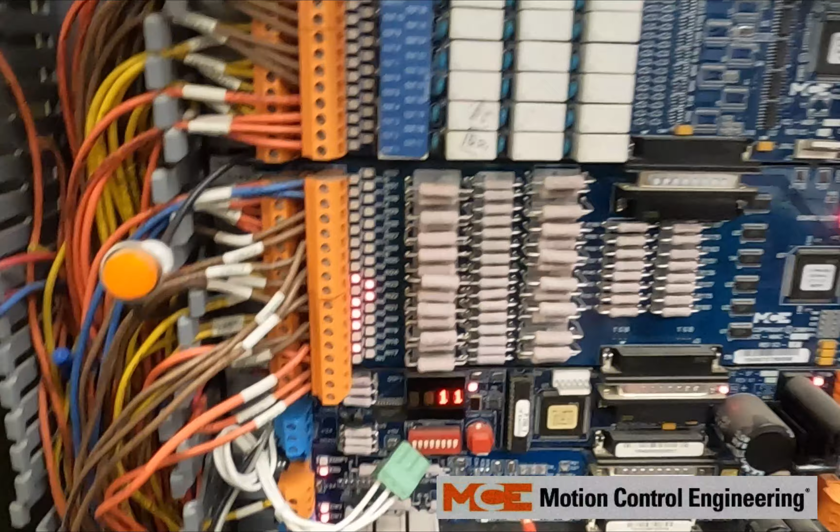We're going to be explaining this for troubleshooting purposes, if you're showing NC on the 4-digit matrix display, 2844, or even 2V, or some other weird number or letters, when it's not showing you the actual position of where the car is at. So follow along and hopefully this video will help you out.

So for troubleshooting, if you're getting any weird messages on your 4-digit matrix display, you want to check your fuse on the SF-CE board, make sure it's not blown. After that, you're going to check your voltages.

You're going to put your meter on DC voltage. You're going to test between 1 and SFX, getting your 18 volts there. Now from 1 to FX2, it's good, we'll be reading 0 volts. There's nothing connected to FX2.

So you're feeding the SF-CE board power. You're still reading NC here or 2V here. There's this 5-volt test point to the left of the diagnostic switches, so you want that to measure close to 5 volts.

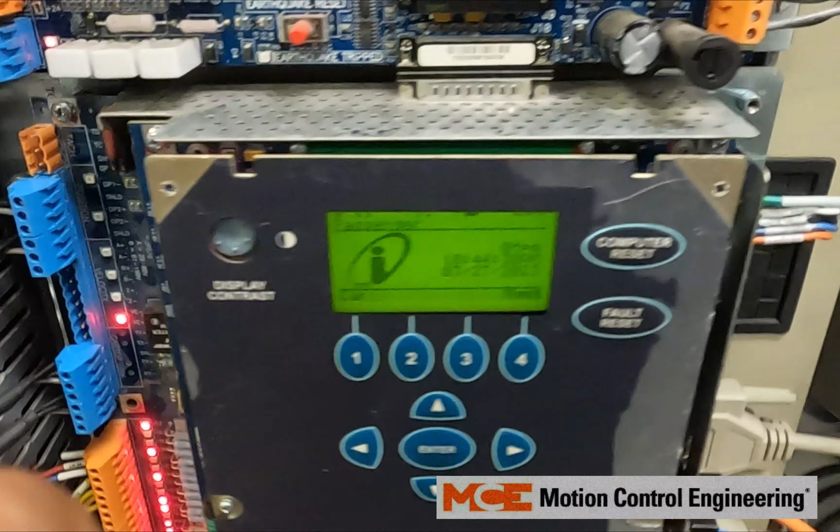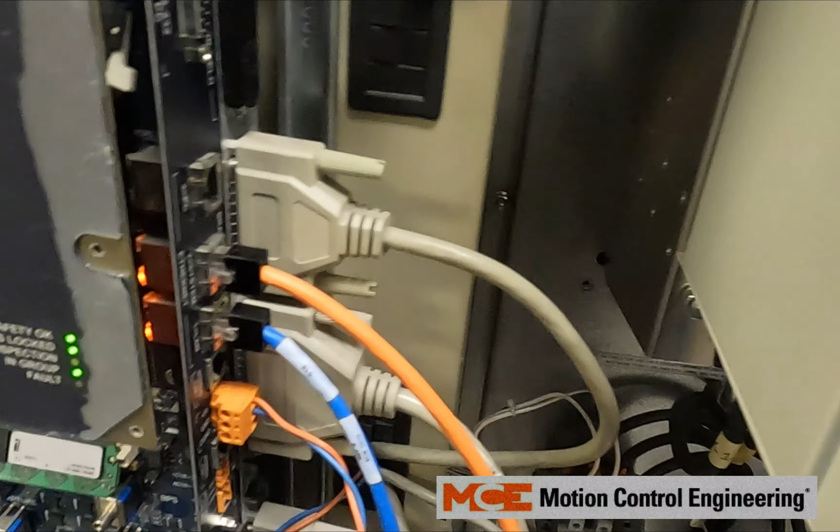So if you're measuring anything too high or too low, you're going to want to open up this cabinet. You got a flathead here, and a flathead down there that you need to unscrew. You can pull this swing panel door open, and then there will be your power supply. There's a 5-volt power supply trim pot that you can adjust on there.

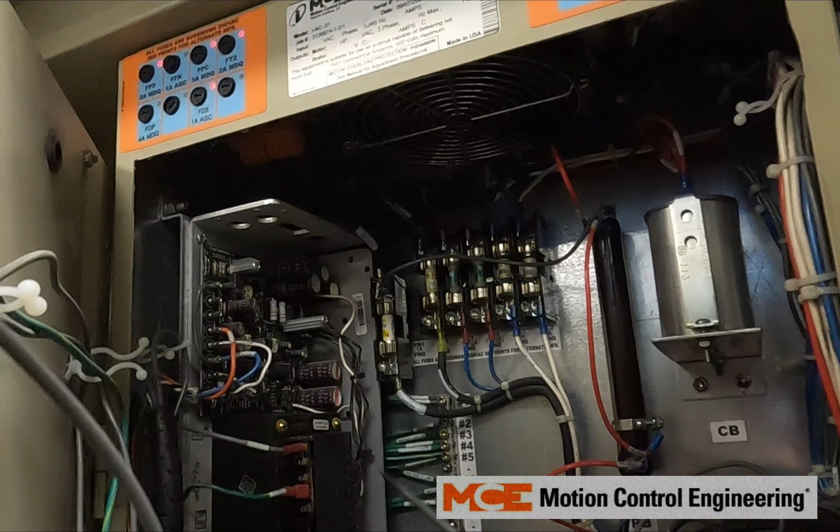So I'll pop this open. There will be your power supply right there, and there will be a 5V voltage trim pot on there that you can adjust up or down to get your 5 volts on that test point for your SF-CE board.

So that's for testing your voltages on your SF-CE board. If you're still showing NC or 2V or 2844, after that's checked and it's reading 5.0 volts DC to ground or common, you're going to want to come over here.

Let's keep in mind we have the IMP board, we have the earthquake board here first, the SF-CE board second, MIAC board third, MOR board fourth.

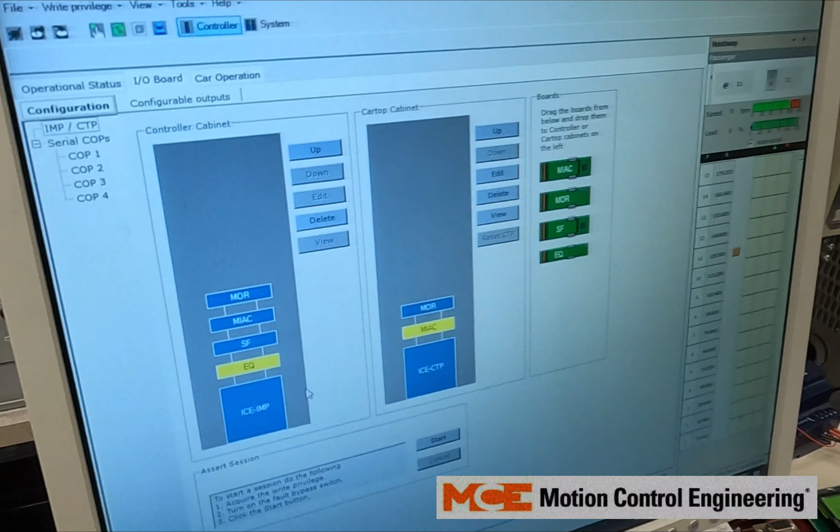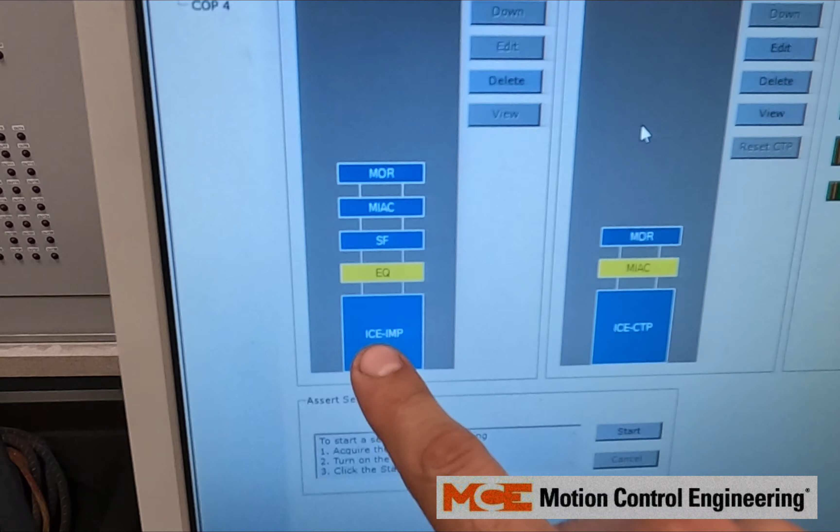So here you're going to go to View, Configuration, IO boards. Get this screen open. You're going to look in the controller cabinet. You're going to see IMP, earthquake, SF board, MIAC, MOR board.

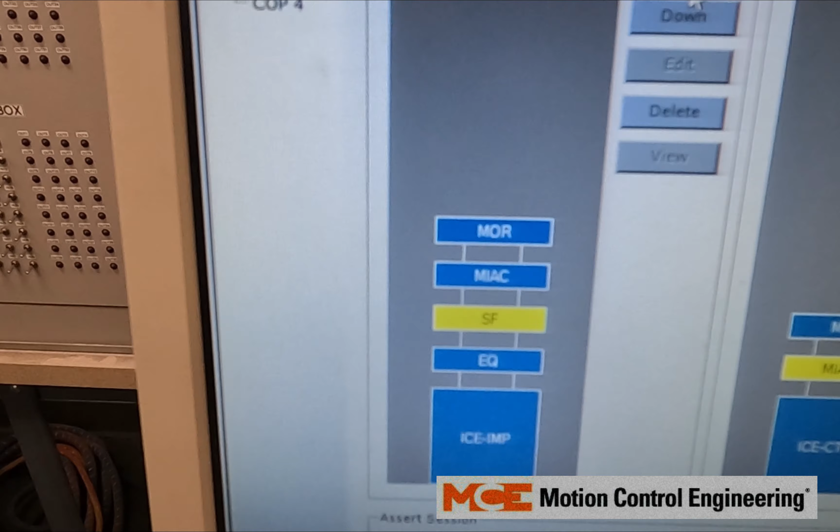Many times this SF-CE board will be up or below in the configuration file, but it's different physically, so we need to make sure that this is the same. If need be, you might need to highlight it, press up or down, and then click Start. Press computer reset on your iBox to see if now you have the correct value and you're not displaying your 2844, 2V, or NC as in no communication.

You could also power down. Make sure that this chip right here is pushed in all the way for the CE electronic chip.

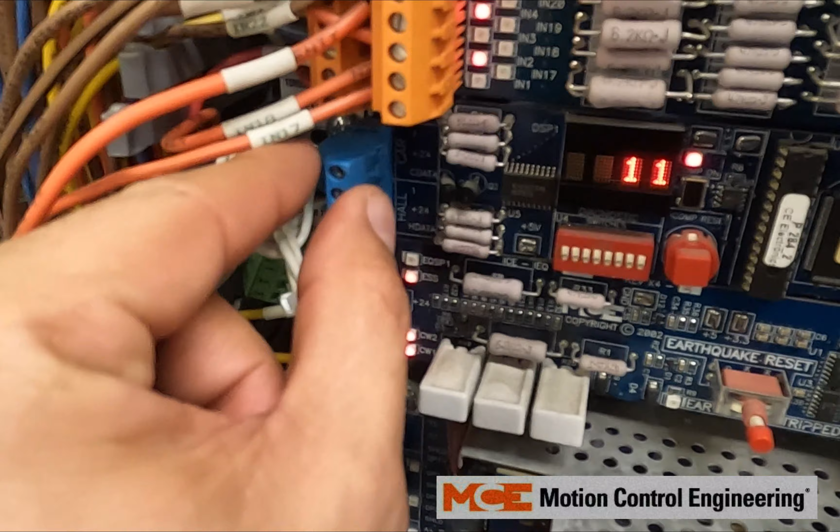Another thing you can try, if you're blowing a fuse on your SFCE board, you could unplug your Hall and your car serial PIs, replace your fuse, and see if you're still blowing the fuse with those connections disconnected, because it could be an issue, you might have a short on your

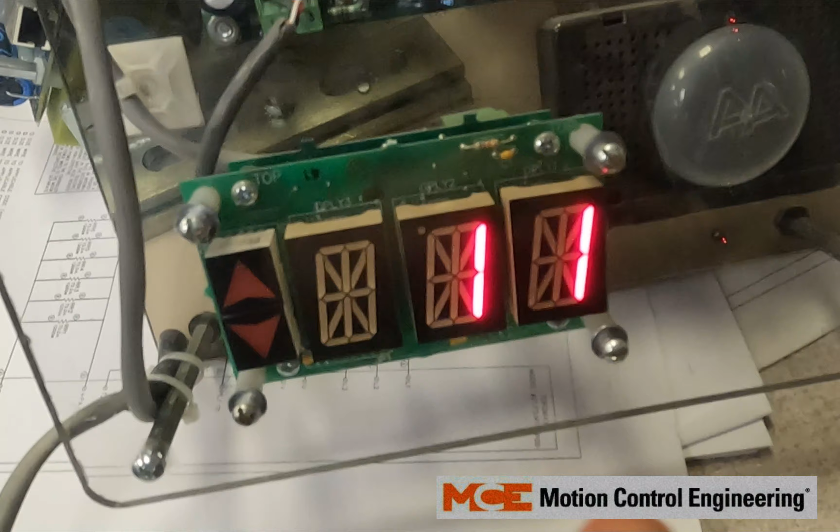PI. So this would be in the car or out in the hallway. You got a SF board sending the CE data and the voltages to your serial fixture inside of the car. So these are CE boards.

There's been times where only a certain amount of CE fixtures will display the numbers and the other ones will be glitching. If you have too many boards plugged into your SFCE board, you may need to contact CE Electronics to get a booster.

So that's it for testing voltages for the SFCE board. We have the correct number there where the car is at. 11, we're at the 11th landing.

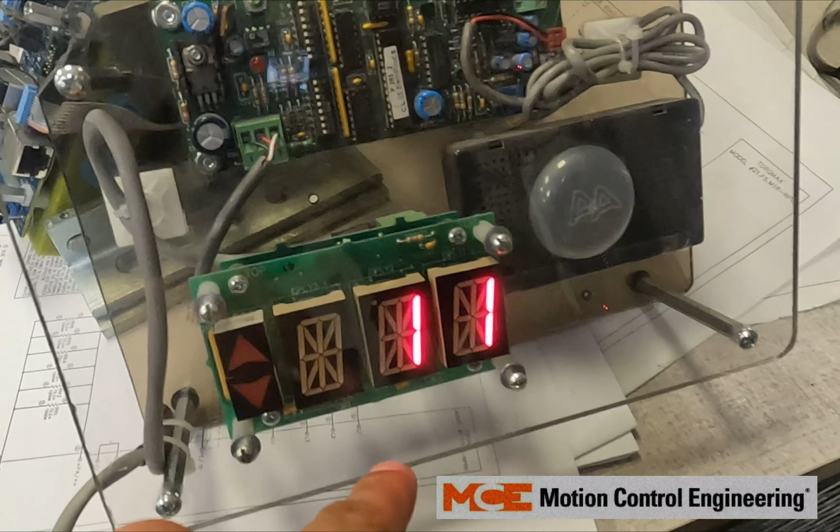The next thing we're going to cover is programming and how you can get the flashing light to go up or down as the car is running. If it's on independent service, it's going to show IN. If you're on inspection, IS. You could also change the programming in your iView.

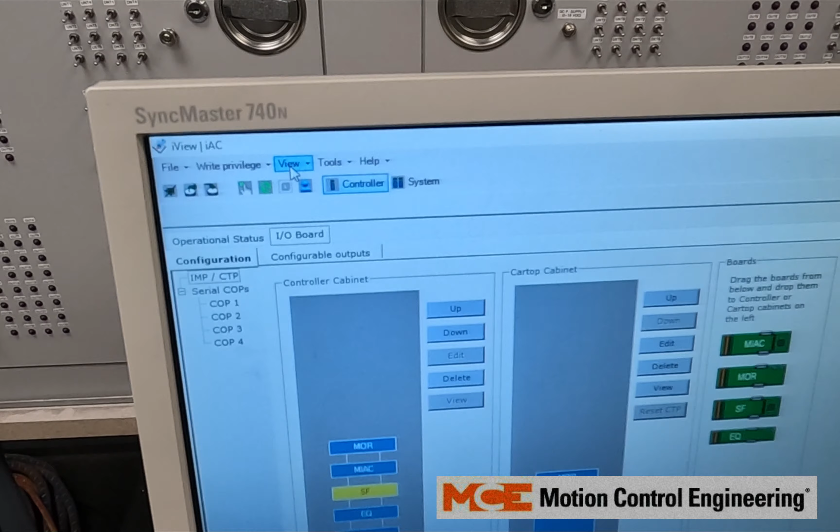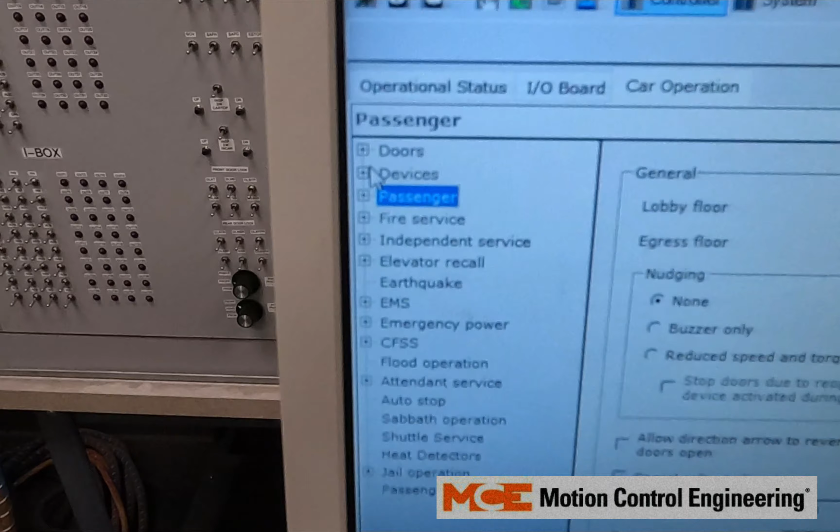So for that, you're going to go to View, Configuration, Car Operation. You're going to click the plus on devices. You're going to click ICE SF interface.

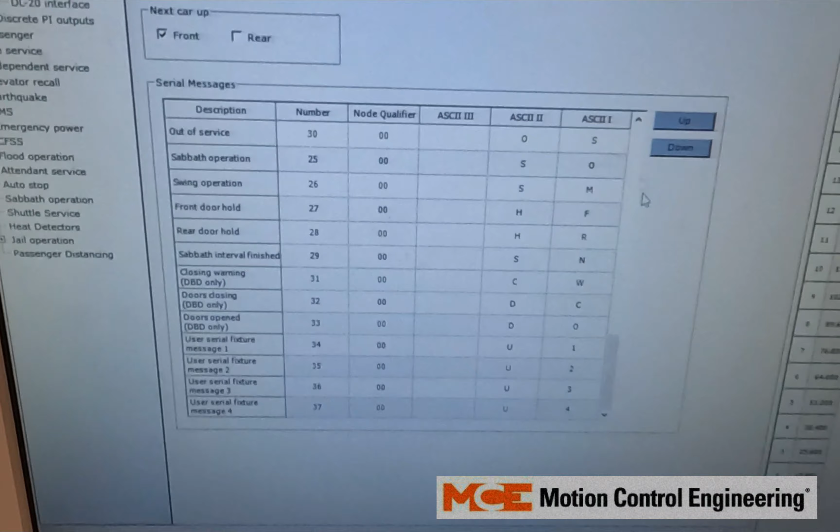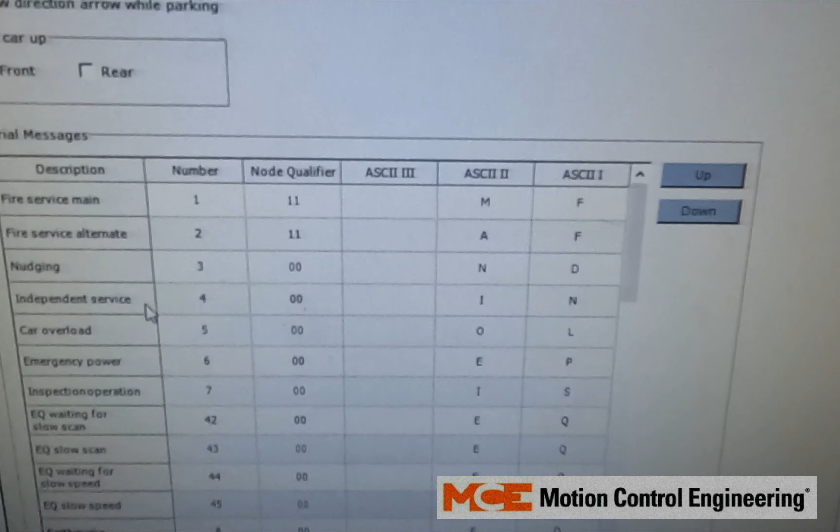So here you can show for what's being programmed. So for instance, for independent service, we have it set to IN. So we're going to go on independent service. Let's see which one independent service is - that'll be input 4.

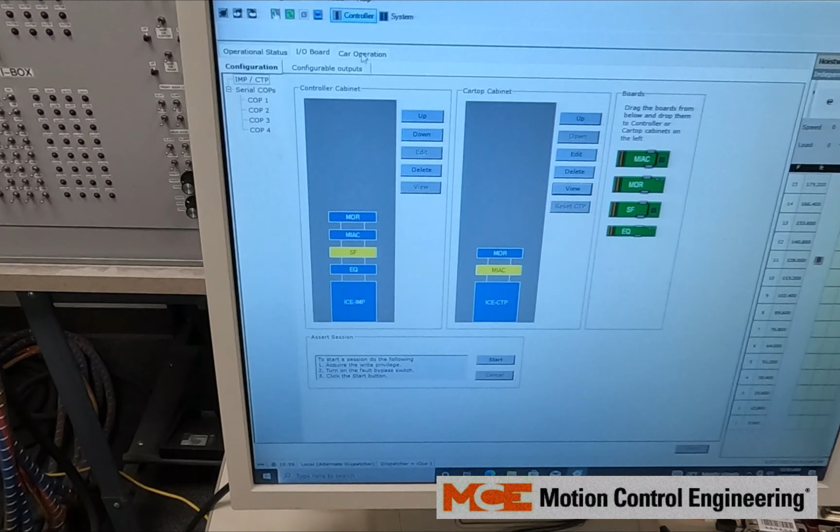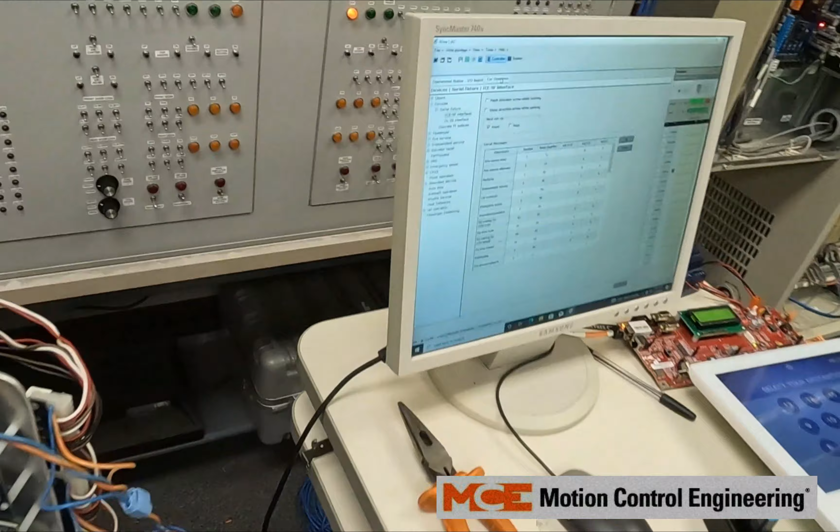It might be a different input on yours. But now we see that we're on independent service, IN in the car. You see IN. So we're going to take it off independent service.

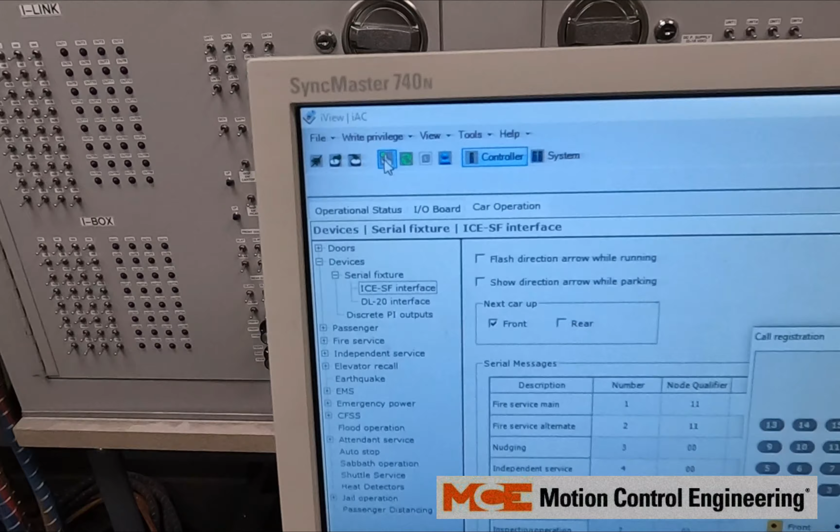You also have this option here to flash direction arrow while running. So we're going to give it a car call to another landing, and we're going to see how it does not flash the arrows - just stay solid.

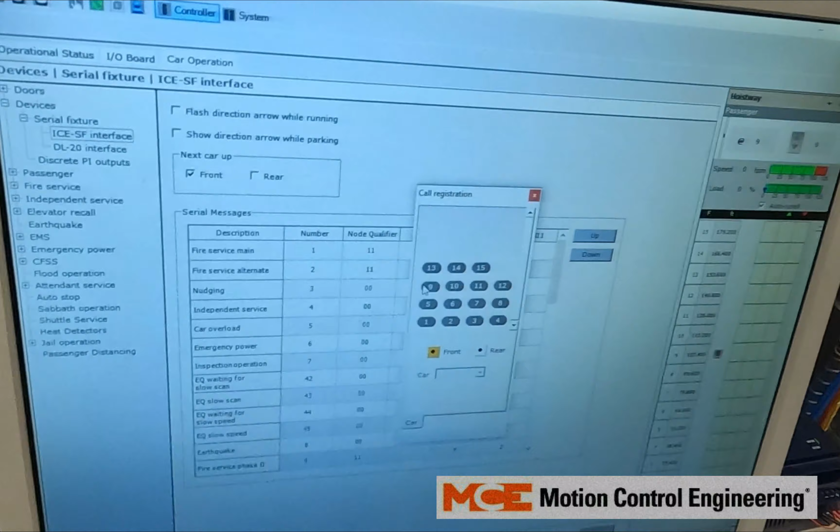So customers might want it to flash. We're going to now click flash, send it. Now it's flashing.

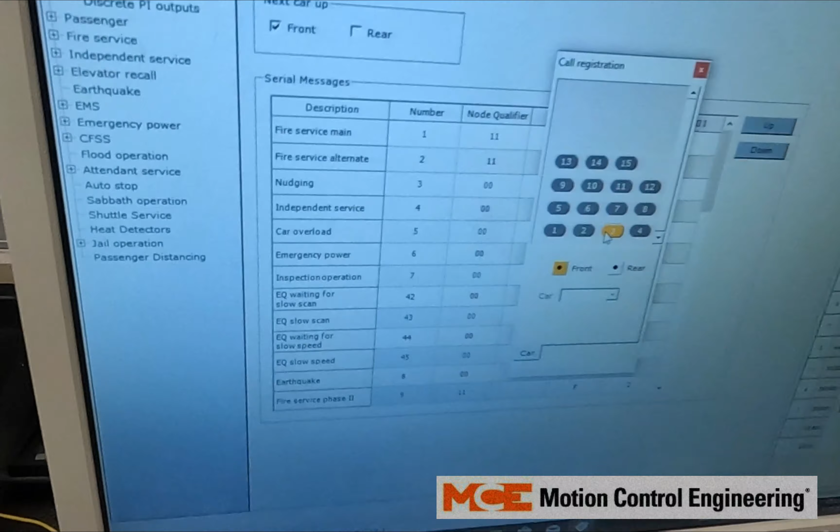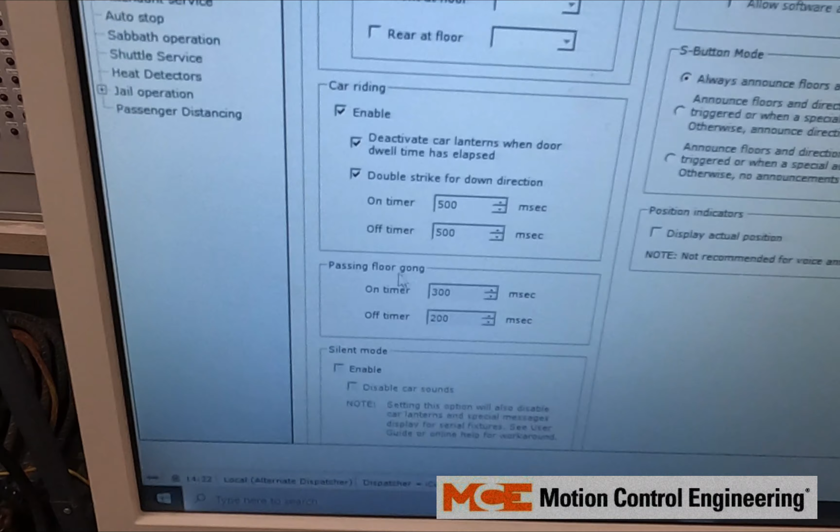So that's where you can program for the flashing. You guys might want to go to devices - you can adjust the car riding to double strike for down direction, the timing for it to be on, for it to be off as well. Your passing floor gongs could be adjusted on here as how long you want them to turn on for.

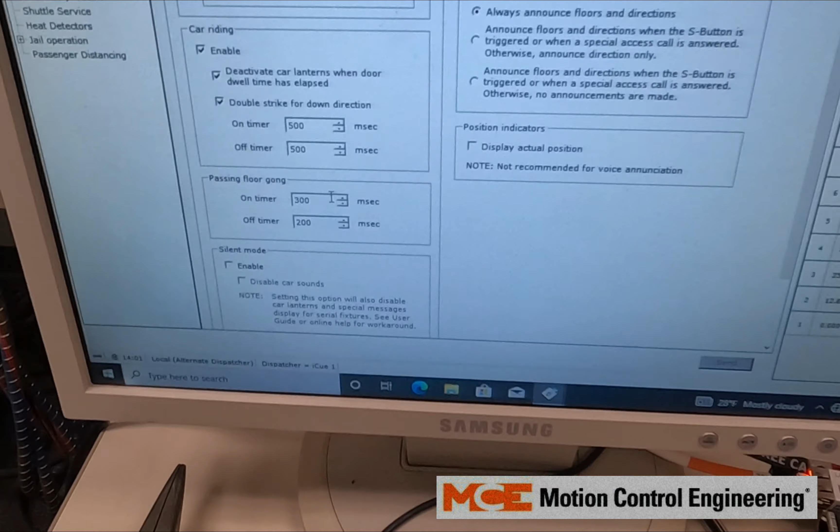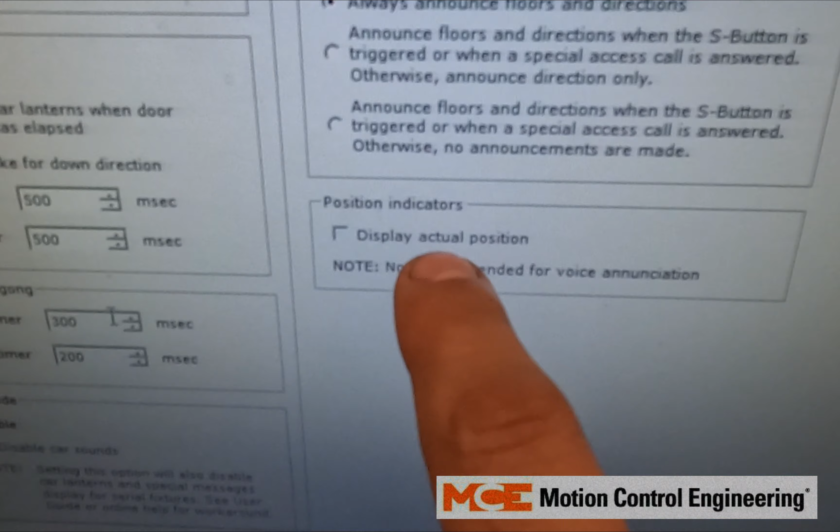If you're having issues too with the numbers skipping while you're on a high-rise building, and they're not going 1 2 3 4 5 6 7 8 9 10 as you're going up the hoistway, it might go 1 5 10. You want to make sure that you do not have a check mark for display actual position. That is usually the issue of why you would have that issue.

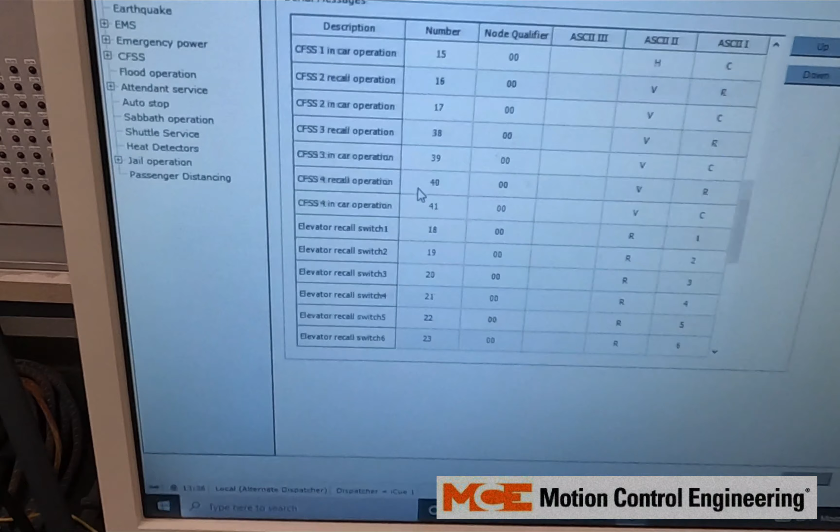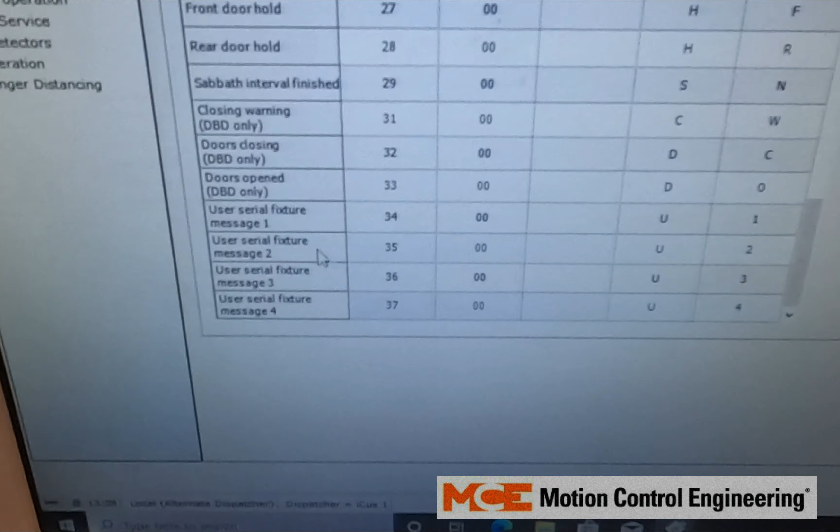So here we're going to give an example of how to program it with a manual configuration. So we have these options down below here. We're going to see user serial fixture message 1. So right now it's for U1. So what we can do is we can double click it. We're going to put an example here.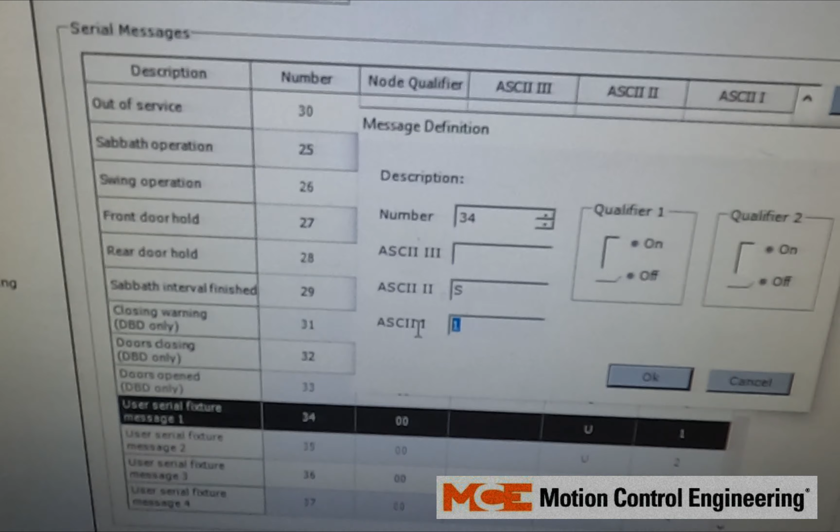We're going to want it to display SW, as in swing operation, or another programmable one. So we need a capital S, capital W. We're going to leave the qualifiers to what they were, the numbers to what they were. Okay, we're going to send it.

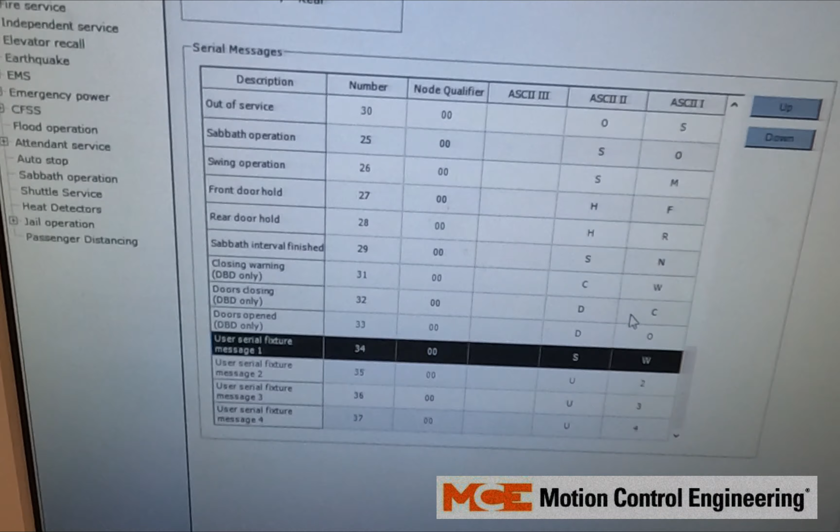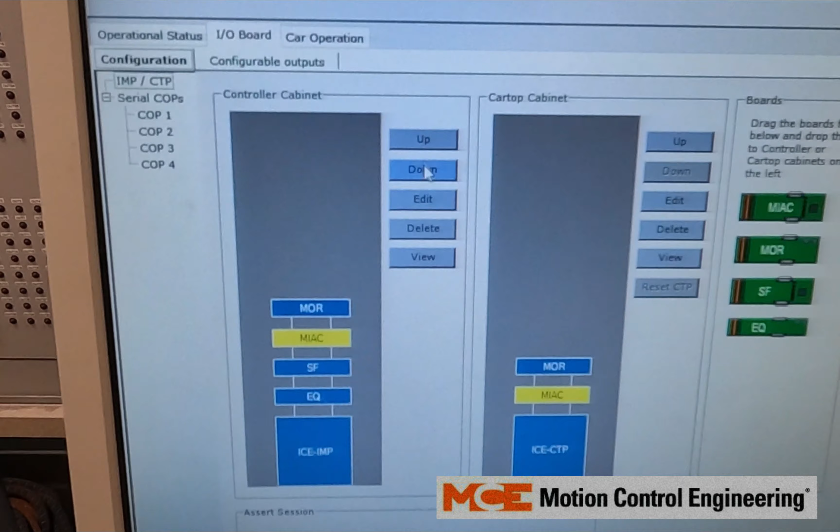All right, so after that's done, we're going to go highlight the MIAC. You're going to click edit. You're going to click this little arrow down. We're going to click on elevator. We're going to scroll down, go in here.

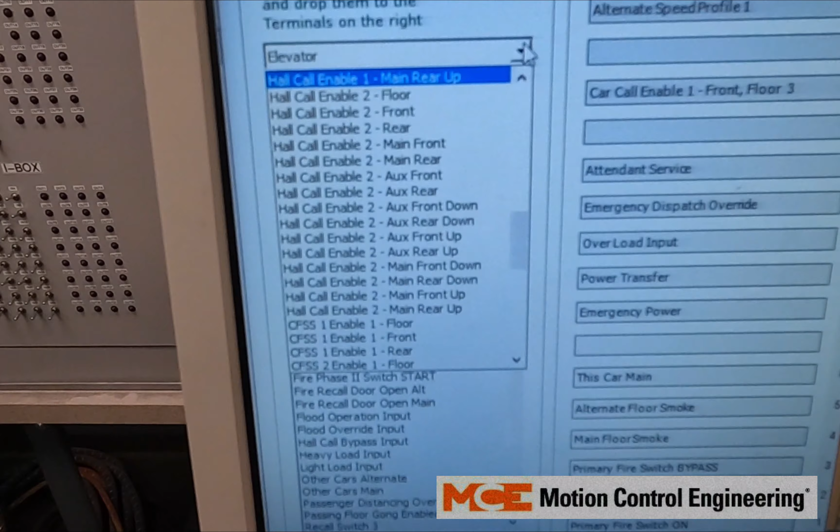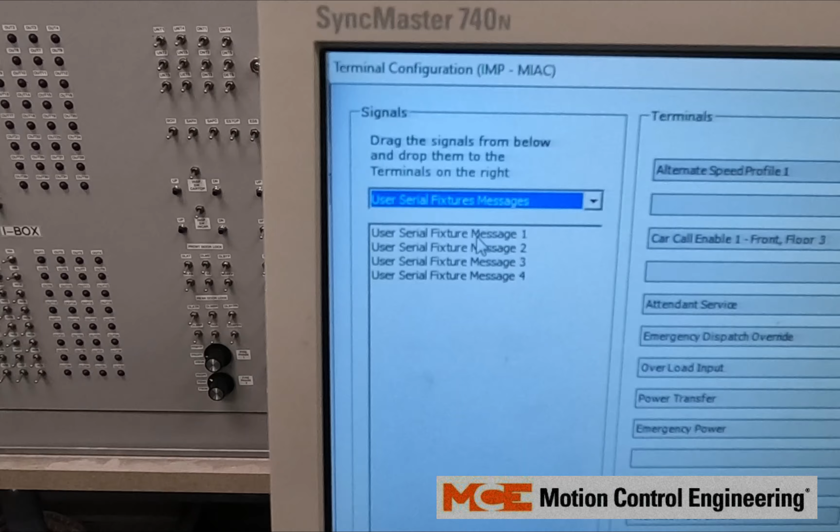We're going to press the little down arrow, and we're going to scroll down till you see user serial fixture messages. So we have that user serial fixture message 1 as we had it set to SW. So we're going to drag that over to input 13. We're going to send it. We're going to press OK. We're going to send it.

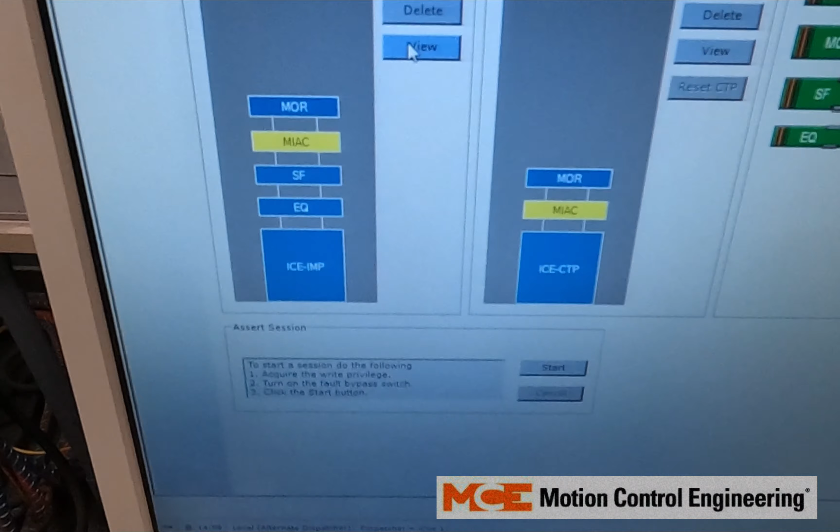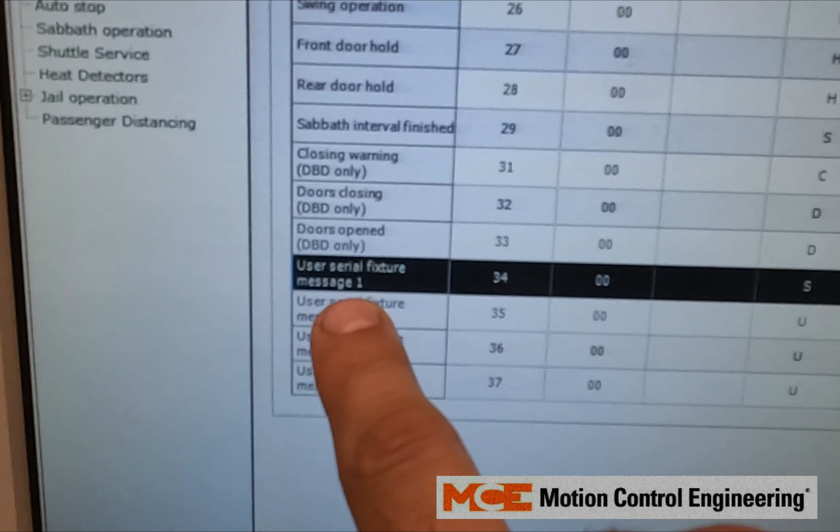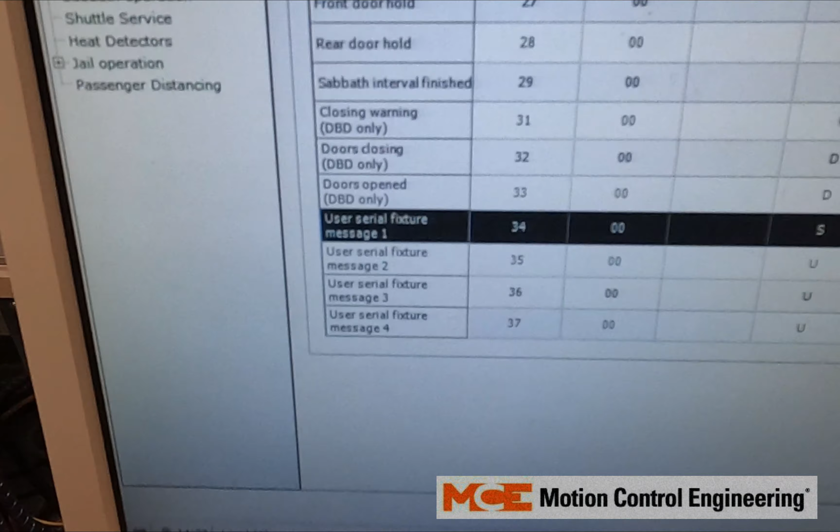So now when input 13 goes high for user serial fixture message 1, it should display SW. Like when you're on independent service, it'll flash IN, or inspection IS. So when this input goes high, it'll flash SW.

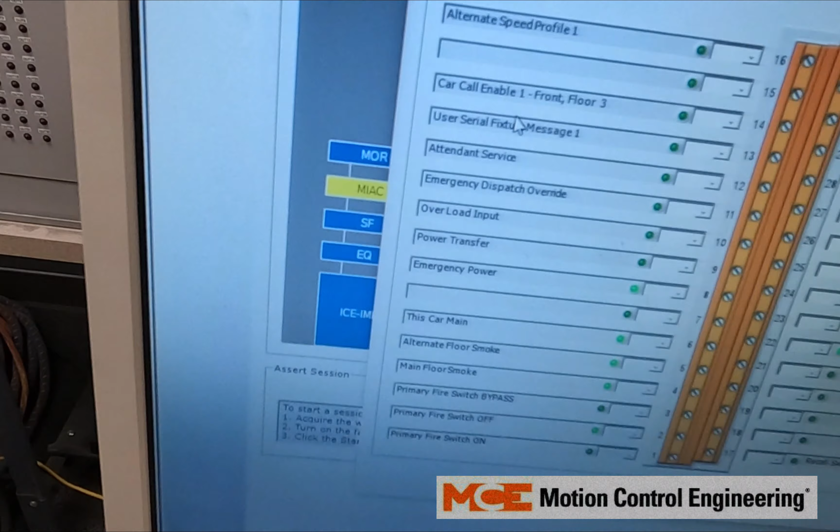You go here, right now it's normal. Click view, we're gonna throw that switch on, and it's input 14. It's gonna go high. It's high. Now this is what's gonna be flashing on your PI, SW.

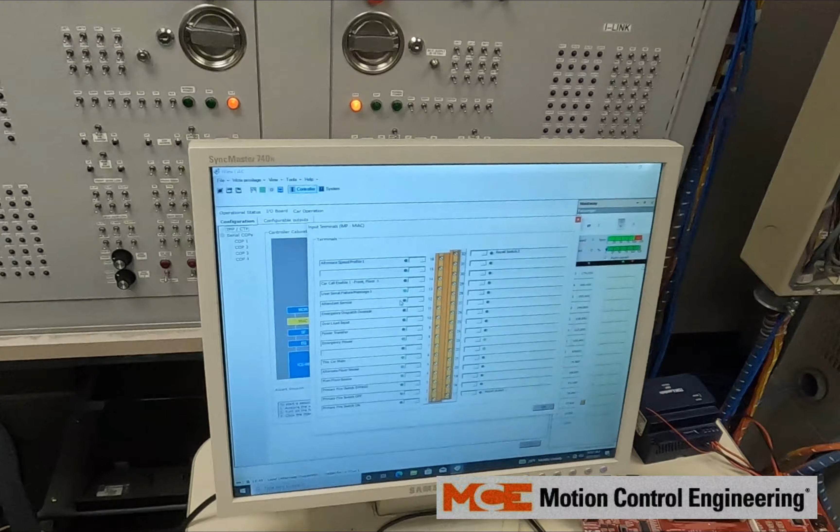So it could be set up depending on how your job is. You can set it up for custom or SW or whatever you want it to flash.